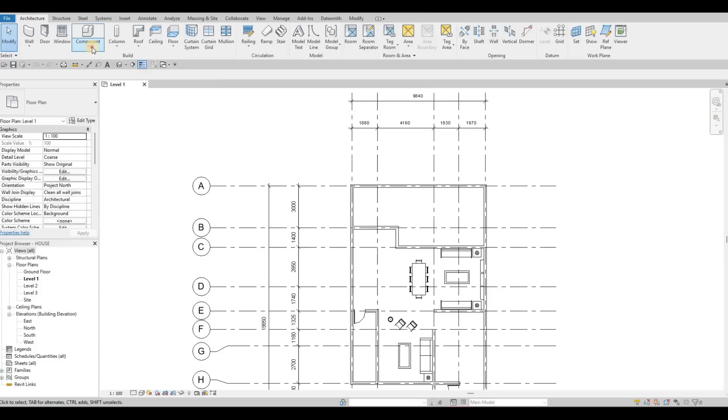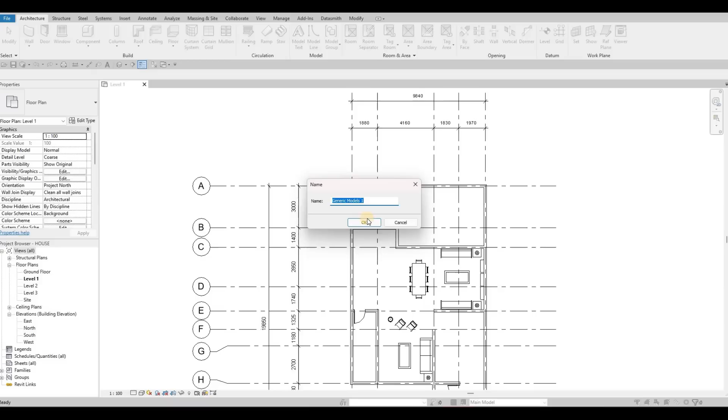So what we're gonna do is click here under Architecture, Component, then Model in Place. We're going to select Generic Model and press OK. You can even name this, like base cabinet for kitchen, but I'm just gonna leave it at Generic Model number 1.

And then after that, we're going to create an extrusion and select this rectangle right here. I'm planning on adding the fridge right on this area, so I'm gonna give some space. The good thing about Model in Place is that it's easy to manipulate afterwards.

So we're just going to create this for now, and then we could extend it or decrease it depending on how we want it. Here, the depth, I'm gonna set it as 700. You can even put it as 800 because we have enough space, so it's really depending on you. Just to be sure, I'm going to put 750, and then here as well 750.

And then of course you need some space on this side for people to have some room to go in and go out from the laundry. So I'm going to extend this one all the way right here, and that's good enough space.

And then here will be the fridge, and I'm gonna create a casing for the fridge, and then we're gonna add the fridge right there. So TR, trim to extend, and then delete this part right here.

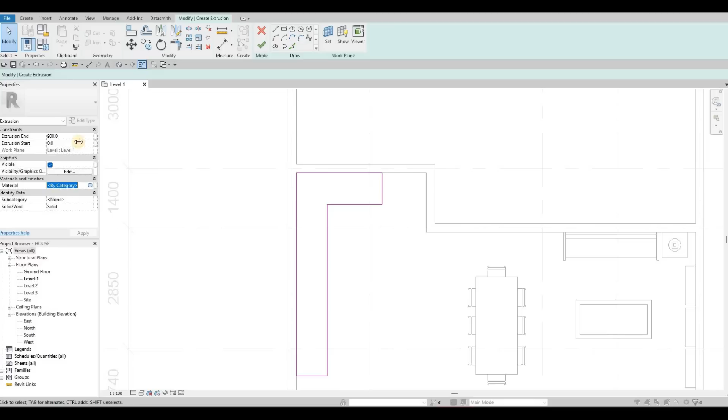And then we're going to create an extrusion around 900. I believe that's 900, yes. Actually we're going to put it at 800, and then we're going to set the material, and choose one of the wood materials. So I'm going to choose one of this.

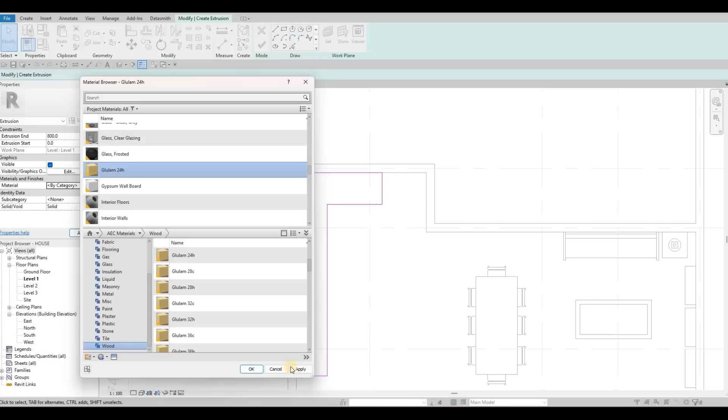I'm going to pull it up, and then Glulam 24h, and then click Finish right there.

So we have that one created, and then we're going to add in our countertop. So we're going to create again an extrusion, but set it at the top of here. So pick a plane, and select the top of this one. Now it will be exactly at the 800 height, and then we're just gonna extrude it 25, so the thickness for the countertop.

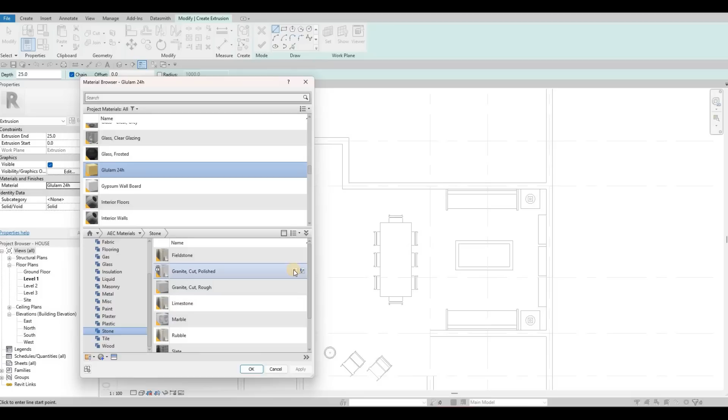And then we're going to put it at a stone material, Granite, Cut, Polished, we're gonna use that. Apply, and then OK. So now we're gonna do the same thing, but we're just gonna use this so that we don't need to do trim and extend, and then click Finish.

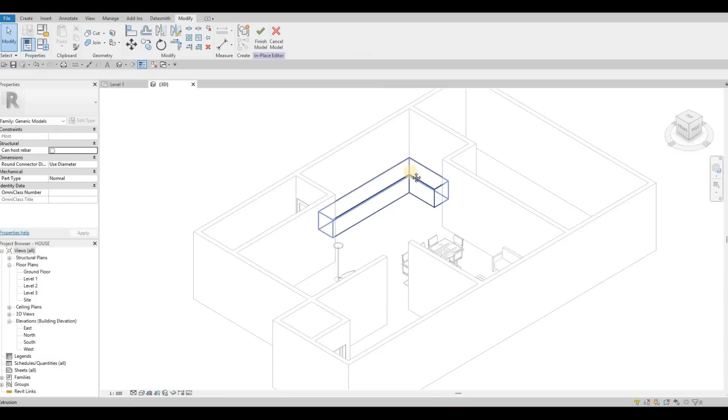So now if we see this one, we could go 3D. As you can see, we have that one all to the proper height, and this one is 25 millimeters thick for the countertop. And then of course we're gonna create some top cabinets as well.

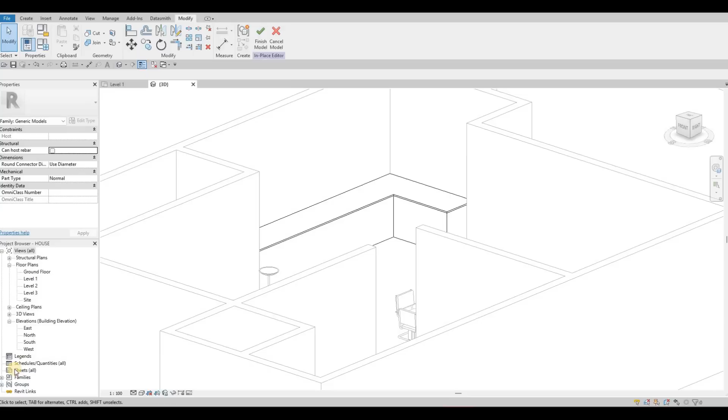So now we're going to go at Level 1 again. And then here, it's really up to you in terms of how you're gonna add it.

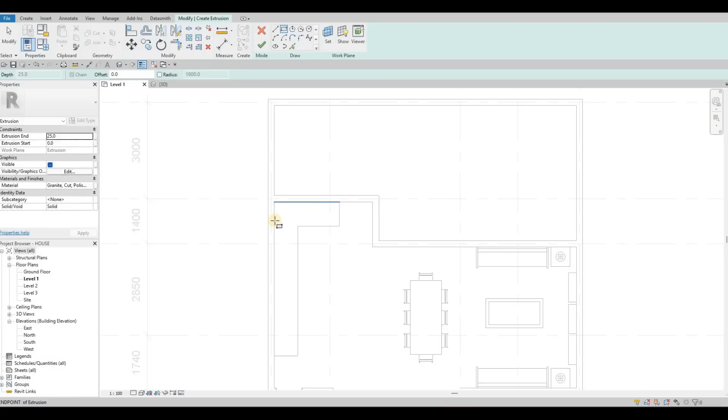I'm going to create another extrusion on top of this, using this rectangle again, and I'm going to add around 500, or even 450 if you want. 450.

This will be for the cabinets at the top level of the kitchen. So here I'm going to trim and extend, and then delete those small ones.

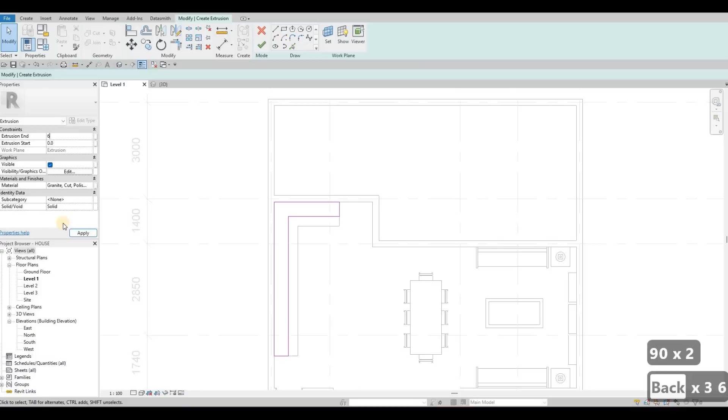Here I'm going to make it a little bigger, 900, and the good thing about this one is I could estimate it while I'm in 3D. So if I finish this, I can pull it up like that. We're going to have 200 for the flooring, so I'm gonna estimate it like that.

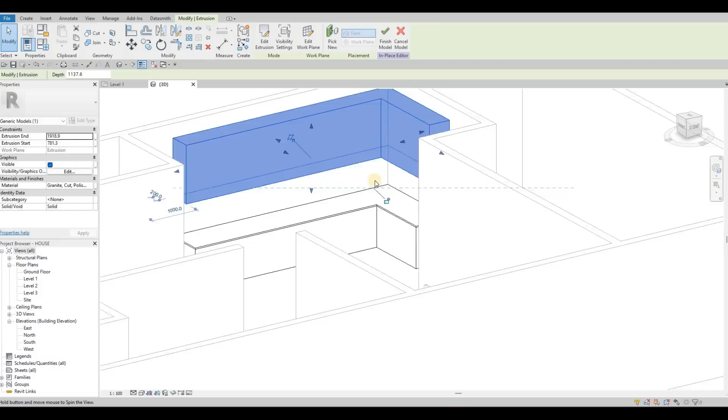And as you can see, we have our cabinets already there. So we can set it up a little bit higher or a little bit lower if you want. I'm just gonna leave it like this. I'm going to have a backsplash as well.

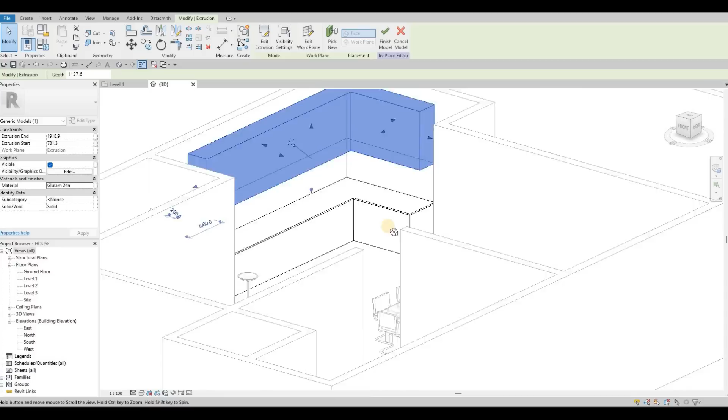We could put in some lights, and then we're gonna put some faces on this kitchen cabinets. But here we need to change it to the same material as the base cabinet, and there you go, that looks good right there. 200 for the floor, so it will be around here. We're just estimating it now, so maybe we could do it properly here. So we have 3,000.

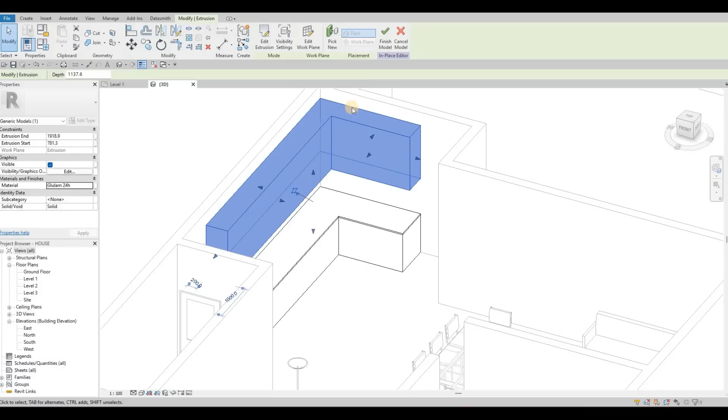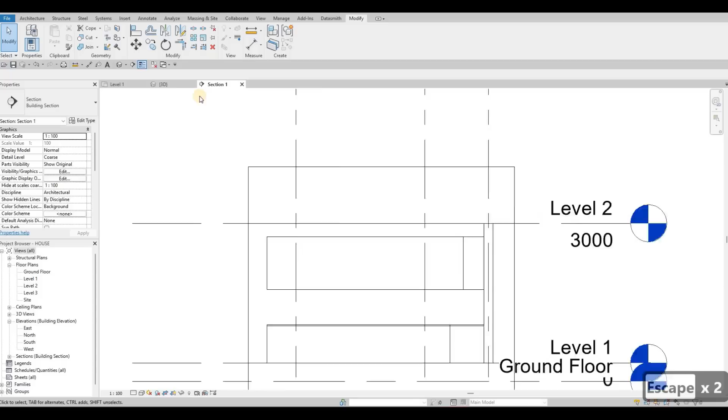What we can do is finish this first, go to level 1, and then create a section. So click here and then section, so we could see everything. Flip this one, press escape, then double click this one. Now we can make this exactly 200. If you want to be exact, you definitely can, so we don't have any more problems.

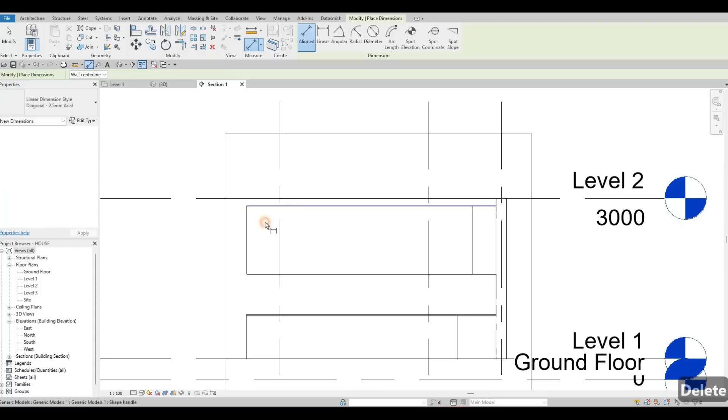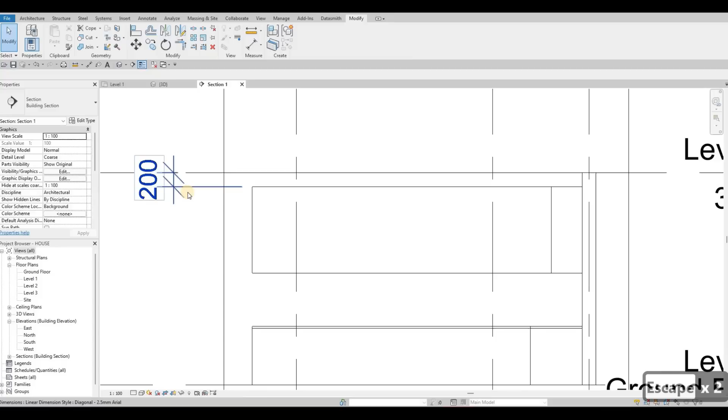For some reason it's not doing it, so I'm just going to manually decrease it there. So there we go, 200. Actually we could even edit in place so that... now I think that's good enough, even for the backsplash. So we're good with that.

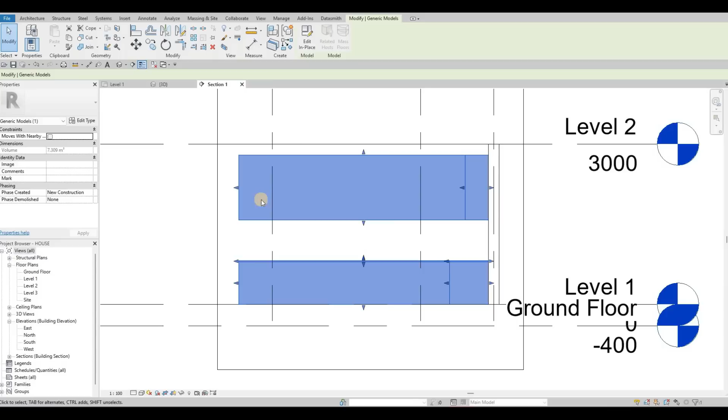We have the thickness here. It really depends on you if you want to pull it up or down a little bit more. For me, I'm just estimating it, and I think this is good enough. So we have this one all the way to the top, and then we have the backsplash here.

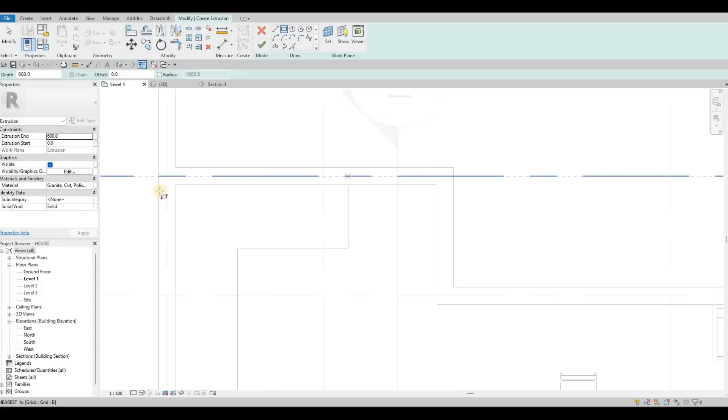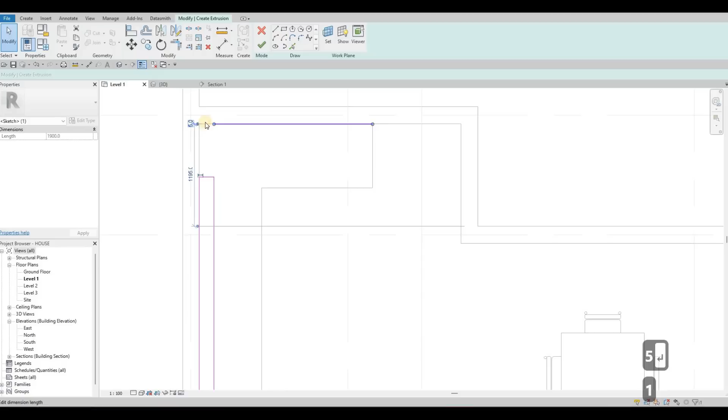For the backsplash, what I'm going to do as well is add something here. I'm going to edit in place, extrusion, and create an extrusion from here. We're going to make it a little bit bigger for now because it's giving us some problems. We could put in 10 — 5 is too thin, so I'm going to put in 10 for the thickness.

There we go. And then we could just trim and extend again, and then delete those small ones. And then we should change the material.

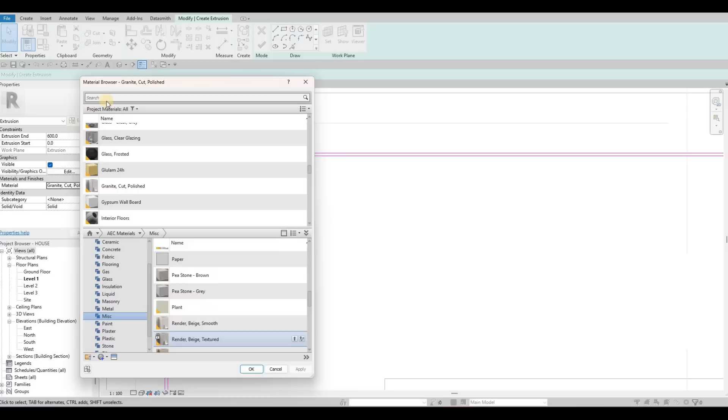So let's go to the stone, and we have — let's use this one, cut rough, or maybe mosaic. Let me look in the materials here, because I know we have... not concrete. Oh, let's put in tile, yes. So ceramic tile — we're going to use ceramic tile.

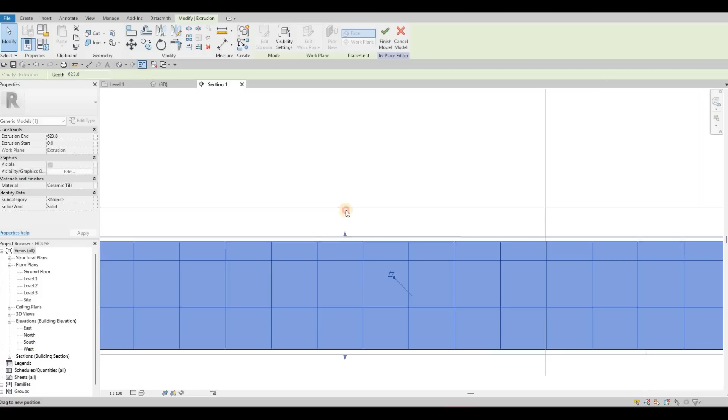So there we go. We should click finish, and then go to section so we could manually pull it up and down if it's too much. So there we go, everything is looking proper. Every distance and everything is good.

So now we could click finish here, and then we set everything else. I want now to add the fridge here, and then we could assess and build the casing for that.

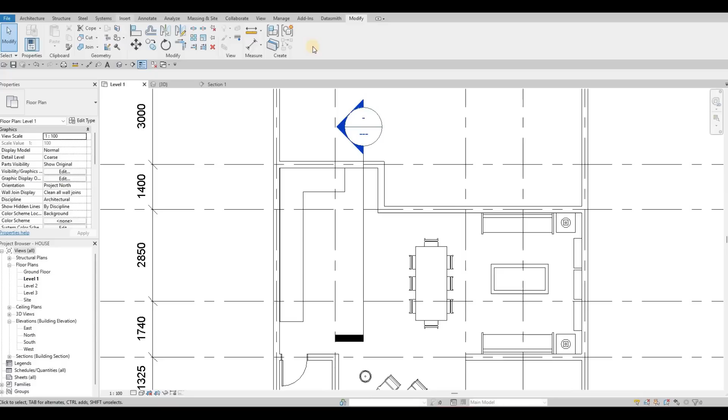So let's go to insert, load family, and we have specialty equipment here, and then we could put in domestic, and mid-range, and select those. So let's toggle to others.

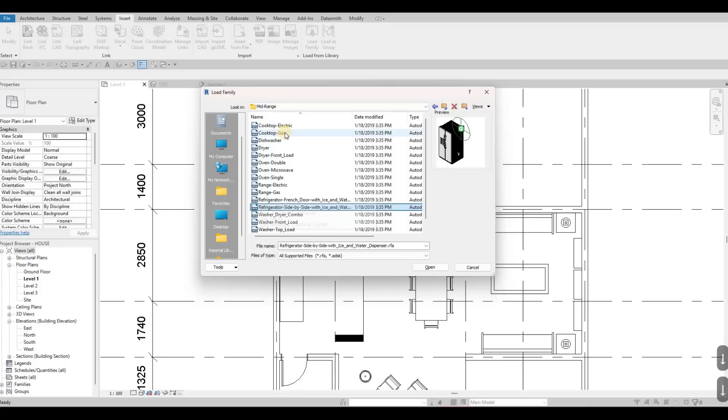Even the range we need, or what we can do is a cooktop — it really depends on you. So this one we're going to use open, then CM, and we could just put it in the middle right here. I'm going to remove the show label, so I'm going to select this one, edit type, and uncheck this one.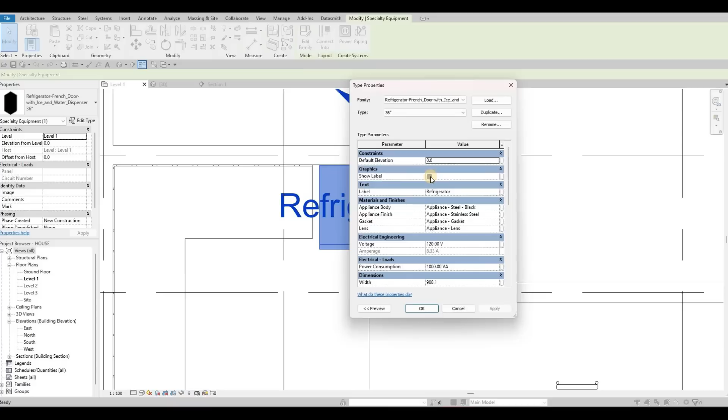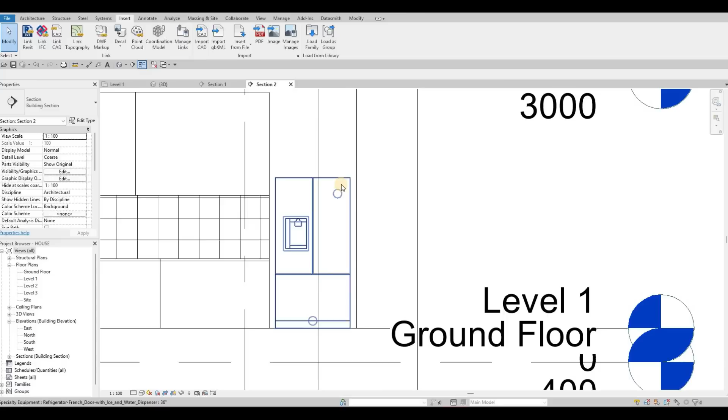So now we could create a section going on this side, and we're going to flip it so we can see what's going on here, and then we could add in the casing that we want. I think the sizing is perfect, so I'm happy with that.

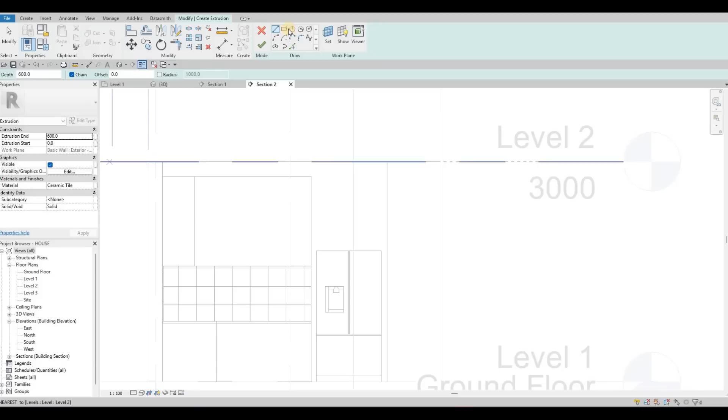So I'm going to edit this, and then edit in place, and I'm going to put in an extrusion, pick a plane, and select this wall. There we go — and we're going to create a casing for this.

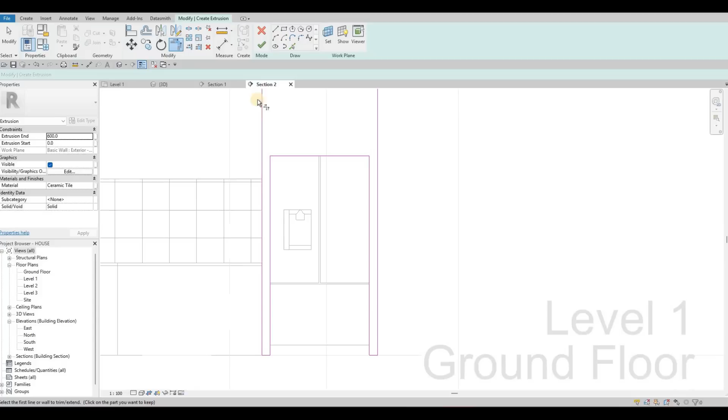And then remove things that are double there. So I'm going to SL, split this one, TR, trim and extend. There we go. And then click on finish.

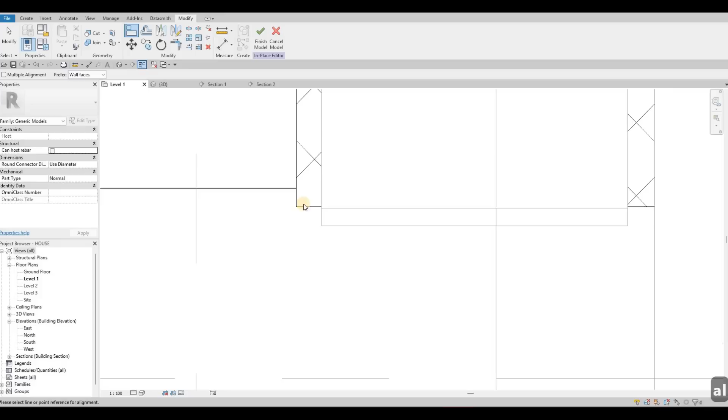And then it's better to look at it on level 1 so we could extend the casing size. We could just put this one all the way to the fridge door. So AL — it's not actually working, so we could just estimate it. That's good enough.

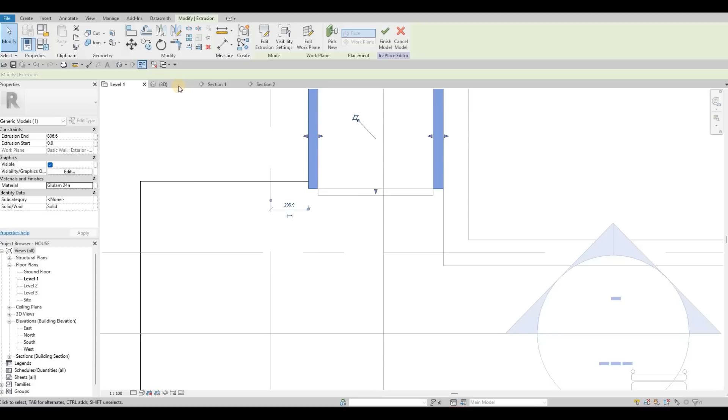Click finish, and then actually we forgot to set the material. I'm going to set the material for this one with the same one, the Glulam. There we go. So now if we see it in 3D, we can see that everything is with casing.

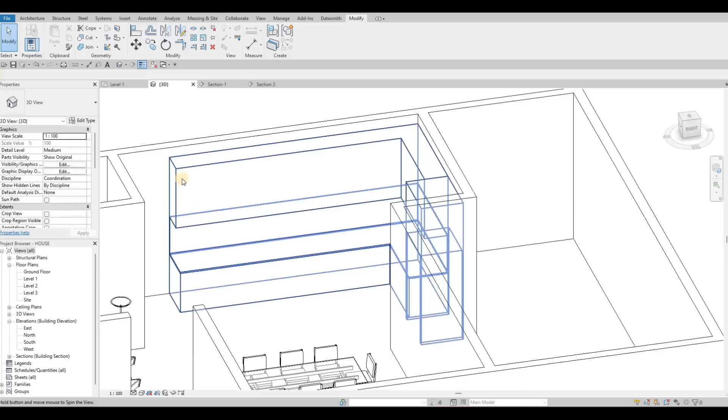And then here I want the same one with the case, but with a different one. So we have those: stove, built-in stove and microwave. I want to add that. So here, because we use model in place, you can see that it's so easy for us to move this one and give some space for what we're planning to add.

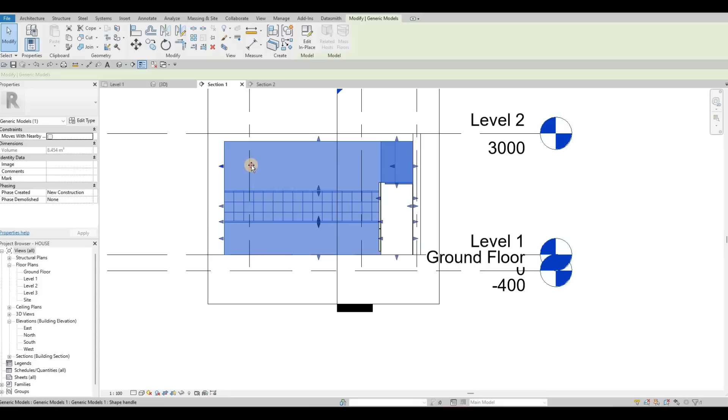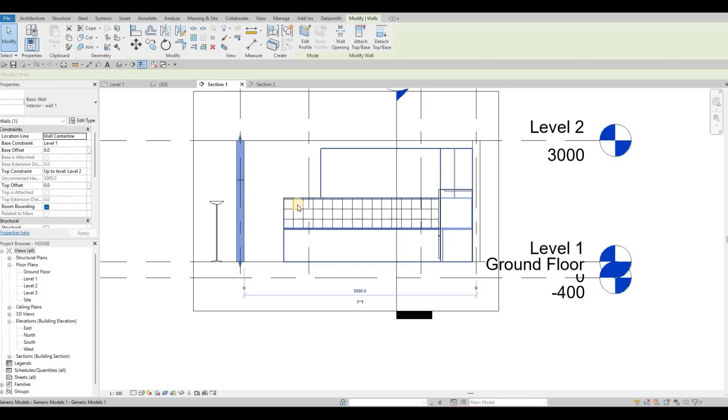So I'm going to go to section 1 to make it easier for me. I'm going to pull it out like this, give it some space. Not a lot, but good enough so that we can see where the door will be. So here is the wall for the door, and then we could estimate. So I'm gonna put it right here so that we have room for people to come in and out. So I'm going to pull it like this, align. I'm gonna move everything else. Align from here.

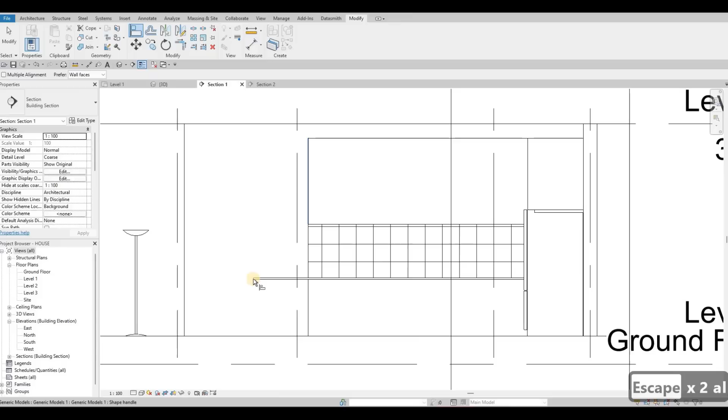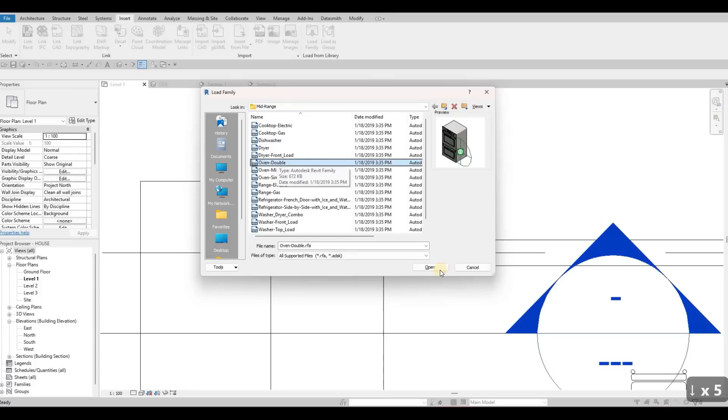There we go. And then let's go to level 1, go to insert, load family, and we have those dual ovens. So this one, oven double. I'm going to use this one. Click open, and then press escape, CM, and then we have the oven right here.

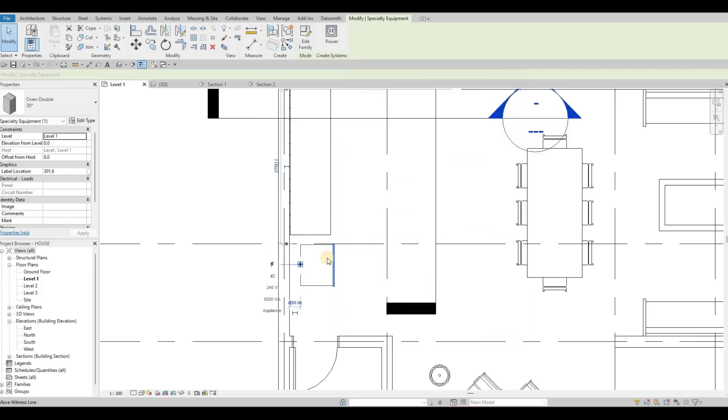I'm going to face it like this, and then remove the label as well so it doesn't bother us, and then align, and then align it right here like that. Move it closer, or if we want, we're just going to estimate. I'm going to put the casing here so we have enough space to walk. So I'm just going to leave it like that then.

Go to section, pull it up so that it's in the right height. I'm going to estimate. We could load here and then load here. There's good enough. So around 800 is perfect height for this one.

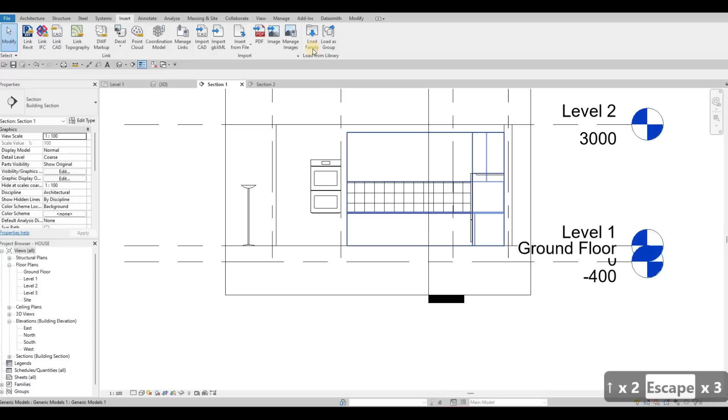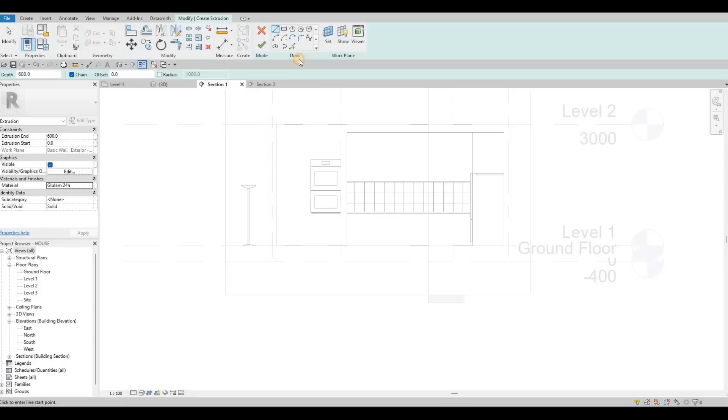And then now we're going to do the casing as well with the same Glulam material. So edit, and then extrusion, pick a plane. We're going to select the wall, and then make sure this one is changed. So Glulam, go down, and then select this one, and then go create the case for this, something like that. Make sure the distance from here is the same one as this, or you can move this one in the middle so that everything looks nice.

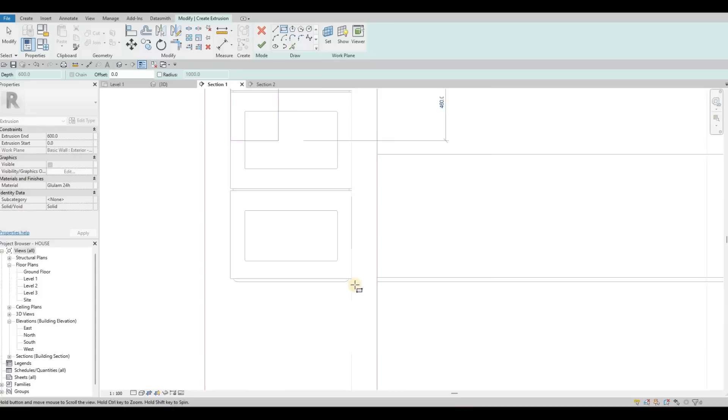And then here we could just create this one right here for the case, and then click finish. And then if we click finish again and go to 3D, as you can see, we have enough. And then you could just move this one again. There we go. And then that looks perfect, as you can see.

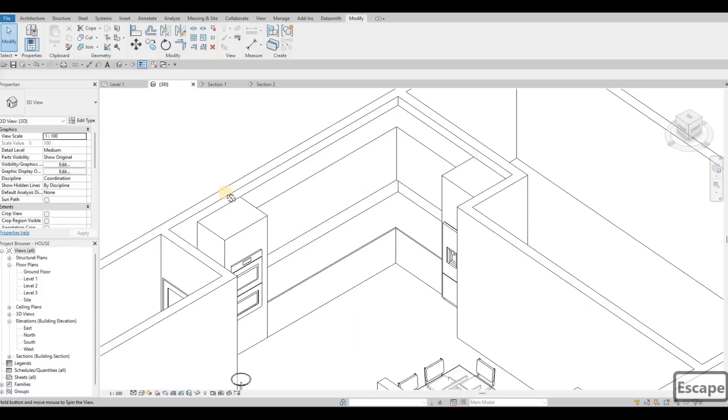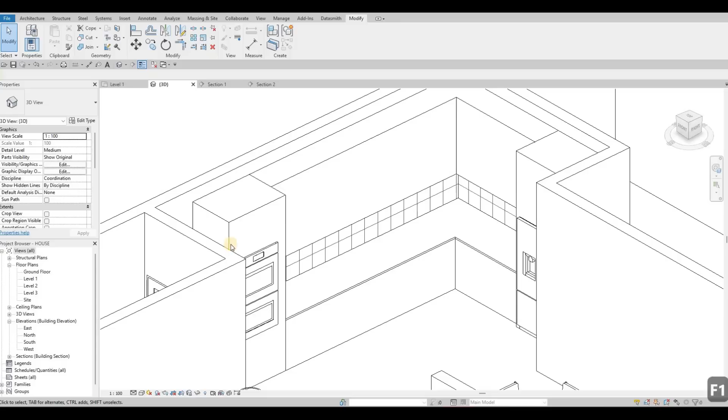And then of course we're going to add the faces for this. So we're going to create those ones. So the plan for the next video is to add those faces. We have the handles already as well.

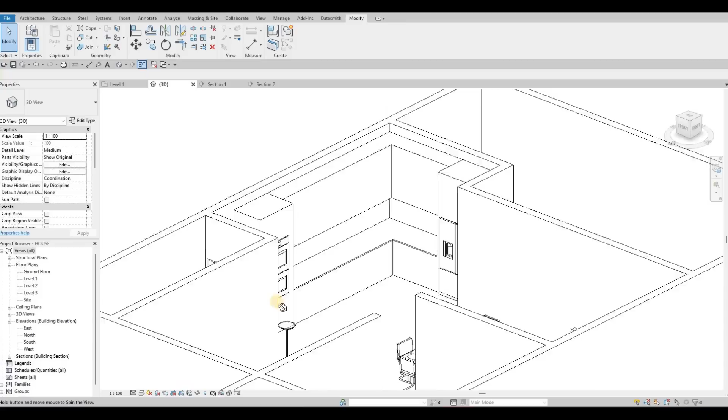So looks like enough space to go to the laundry room, and then we have this one right there, and then the fridge right here. We're gonna put in cabinets at the top as well. We could put a big cabinet here, and then maybe we could make this one open just to change it. So actually we could do that now, just quickly.

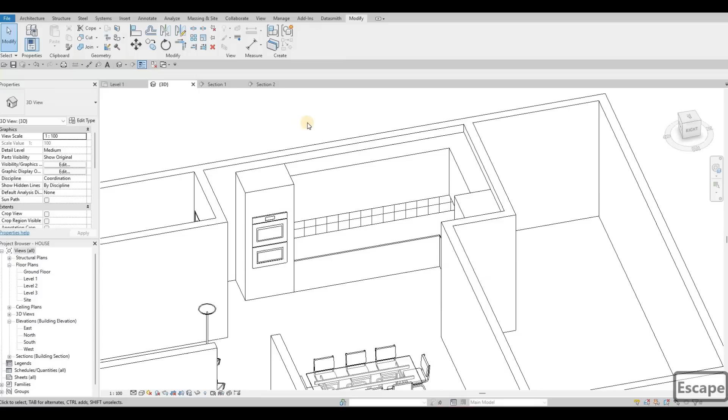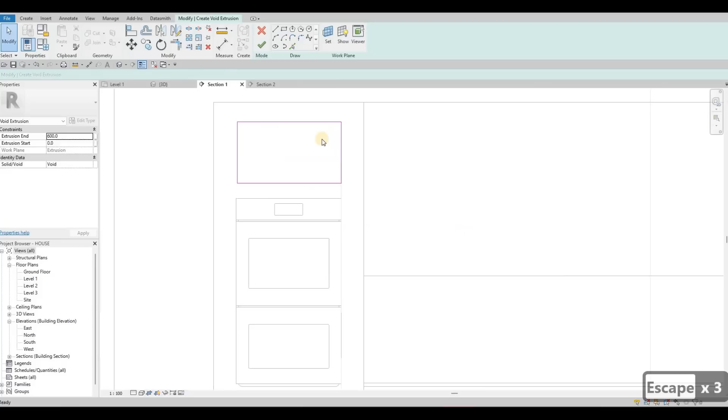So section, select this one, edit in place, and then we could create, and then void extrusion, pick a plane. We're going to select this plane right here. And then we're going to create the rectangle right there. Align. And then click on finish.

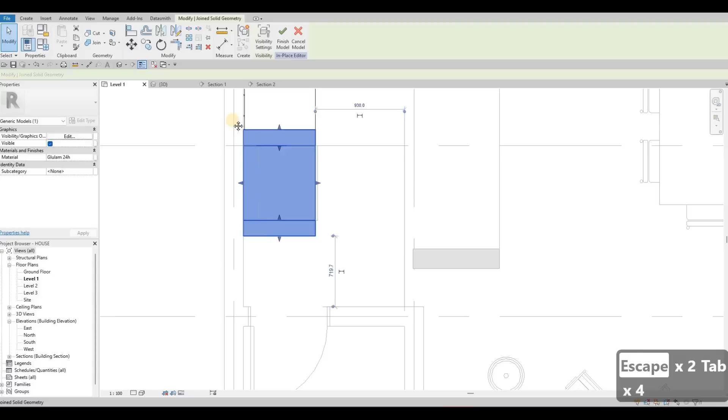And then let's go and cut geometry, and then let's see how it looks. It's better to see it right here. And then we can pull it back a little bit so that it's not all the way. So that's looking good right there. So I'm happy with the way that looks there.

So in the next video, we're going to continue working on this.